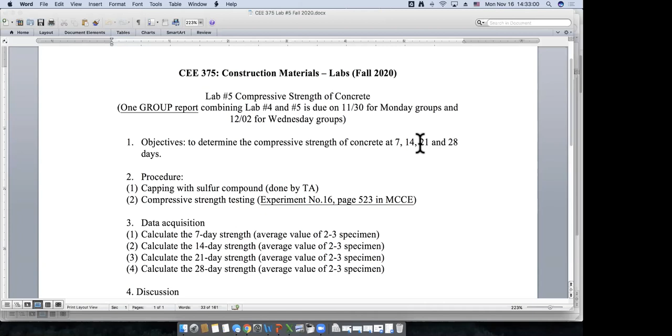The objective of this lab is to determine the compressive strength of concrete cylinder at 1 week, 2 weeks, 3 weeks, and 4 weeks.

The procedure is pretty simple. First, we get a cylinder which is cured in the curing bath, and we cap the top and bottom end of the cylinder with sulfur compound. The goal of using sulfur compound is to make sure the top and bottom end of the cylinder is smooth, otherwise we're going to generate stress concentration if the surface is not smooth, which will affect the results.

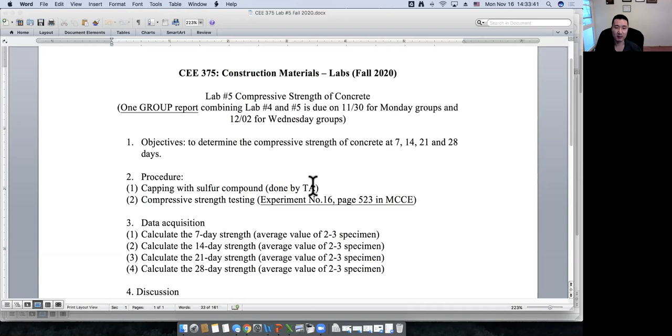This is going to be done by our TA. Then we put the cylinder in the compressive strength machine, and we check how much load the cylinder can take before failure.

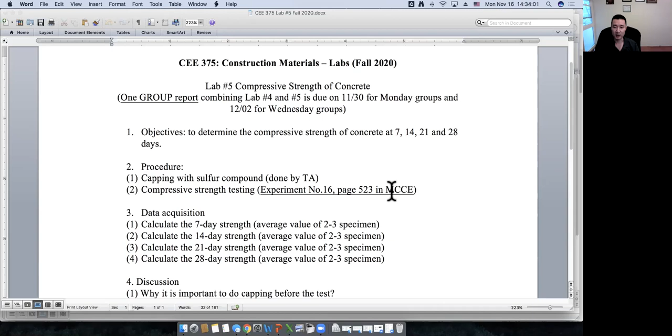This is the procedure for experiment number 16 in our textbook. I will upload all the raw data. So 7, 14, 21, and 28 is raw data, which is how much load in pounds the 3 cylinders can take at different ages, and you should calculate the 7, 14, 21, and 28 day strengths.

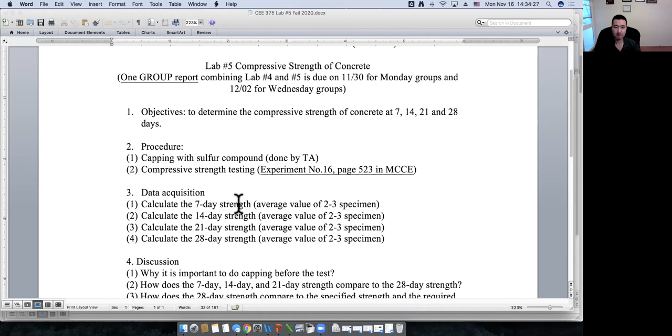For example, this is the 7 day strength, which is in pounds: 24,625 pounds for cylinder number 1. You should take the average of the 3 cylinders.

The strength, which is in a unit of PSI, pound per square inch, is the total load in pounds divided by the area, the cross section of the cylinder.

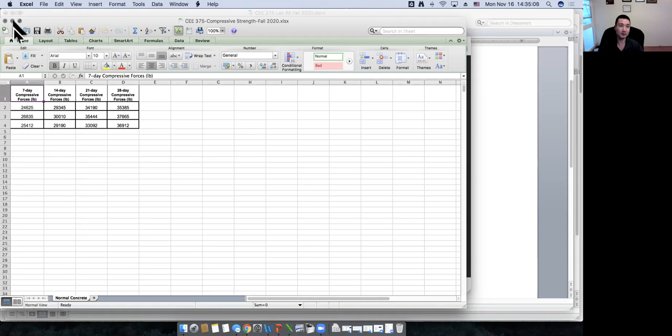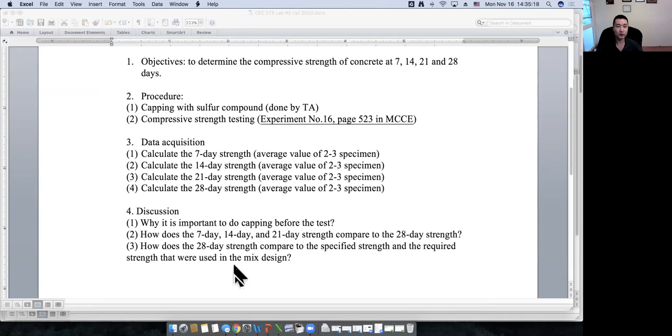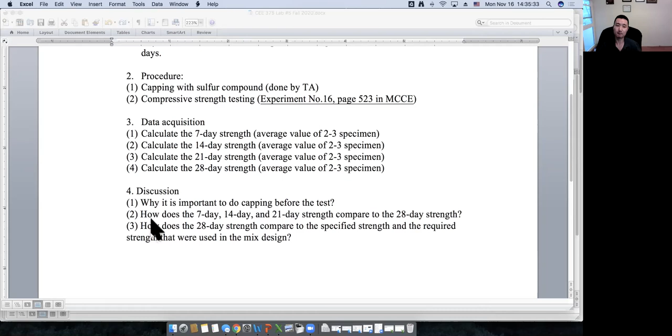Also don't forget to do the discussion, answer the questions. For example, why is it important to do capping before the test, and how does 1, 2, 3, and 4 week strength compare to each other? And how does the 28-day strength compare to the design strength, the specified strength, and the required strength that we use for our concrete mix design?

So next, let's look at the video.

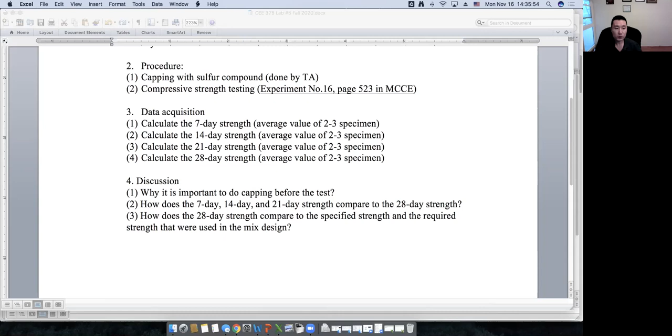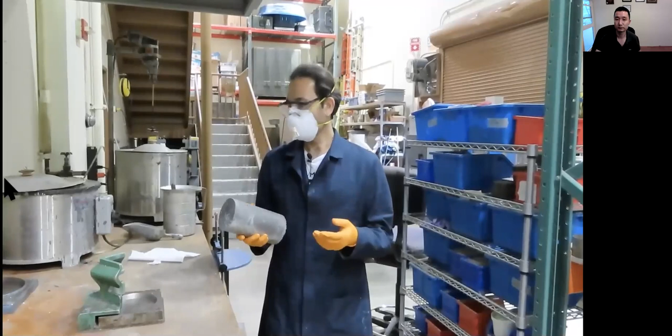I prepared my concrete samples, and today, after 7 days, I'm going to test it for the compressive strength. But before that, I'm here to cap my samples. As I explained, the upper and lower part of my sample is not even enough, and if I don't cap my samples on both sides, what I get is concentration of the stresses, and the numbers that the compression machine shows me is not accurate, typically lower than reality.

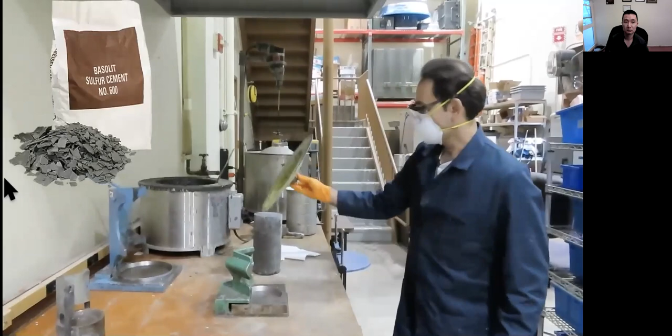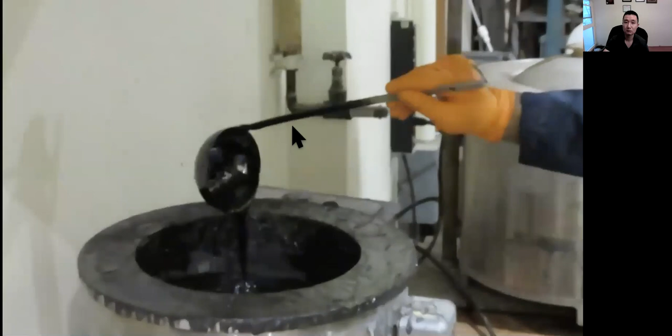So what I'm going to do today is use this capping compound. I made it 2 hours ago because I need time for the compound to totally melt. The heater melts the compound, so it is like liquid, black liquid. It is super hot, be careful, it is 450 degrees, and we need to wear something suitable to cover our skin. If for any reason it splashes on our hands and arms, the covering could help us a lot.

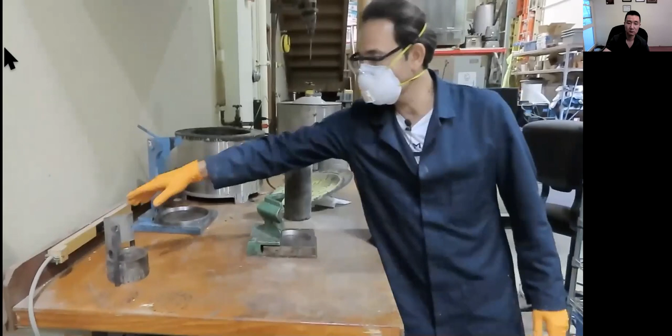We just need a suitable mold. We have 3 different molds depending on the size of your sample: the smallest one, the medium size, and the large one. For my case, I just used the medium size because it's proper for the size of my sample.

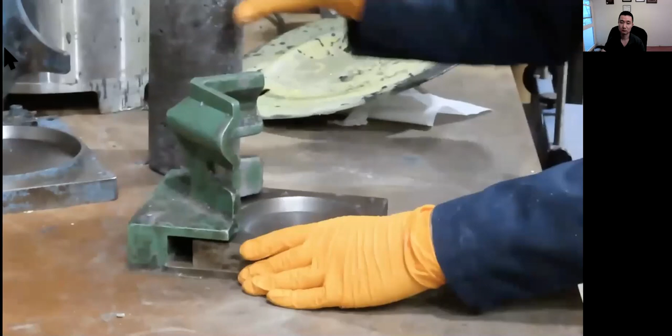Before pouring the compound in it, I have to use oil, motor oil, but not too much. I just make sure I cover all around the mold because it's going to splash on the mold, and I don't like to struggle with the mold taking out my sample for several minutes. I clean up the excessive oil because I like to have something totally even. If you have excessive oil on the mold, the capping surface is not going to be perfect, and you might see some bubbles on the surface you're capping, and I don't like it.

Okay, so my mold is ready. What I need to do is, after I pour the compound into my mold, I put my sample in its place and try to hold it vertically to this part, because this part helps me keep it vertical, and then these two surfaces are going to be parallel. Otherwise I'm going to get something like this. Make sure you hold it for some seconds, and after some seconds the compound is going to cool down and turn into something solid, and then you can release it.

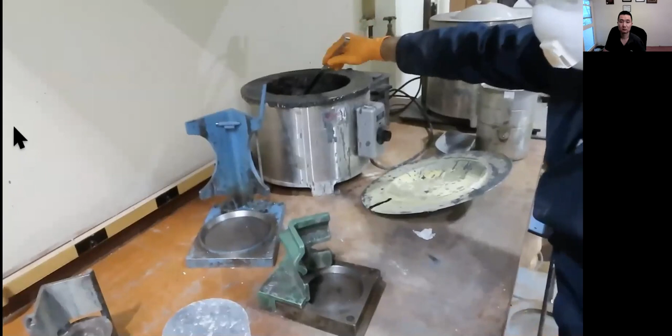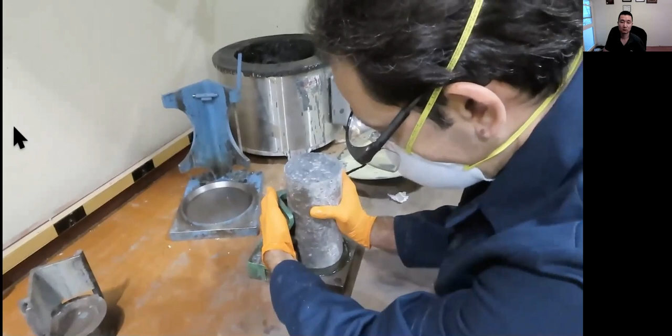The surface of my sample is not that bad, so I don't pour that much compound, just a little bit, to make sure it cools down quickly. So be quick and be watchful about yourself. I'm holding it for some seconds.

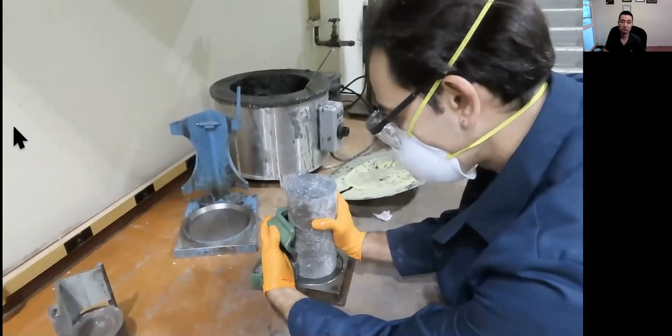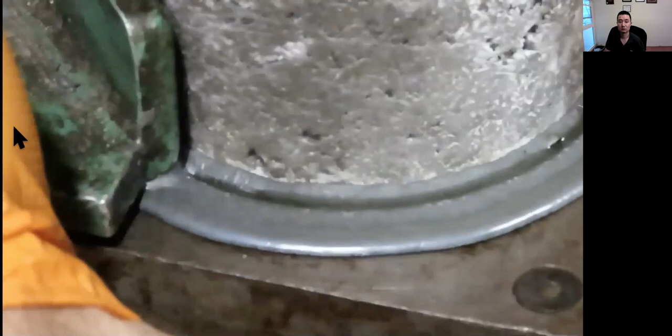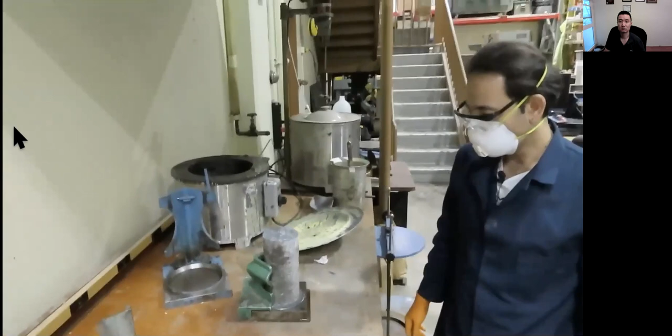If you look at the capping compound, it is dark gray now, and it is glassy, and it is turning into something with a matte color. When it is not shiny, it means your capping compound cooled down, and you can release your sample, but don't grab it yet, wait a little more. And now it's ready, so you can take it out of the mold.

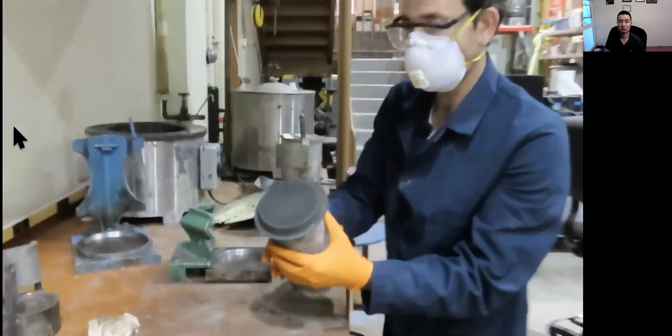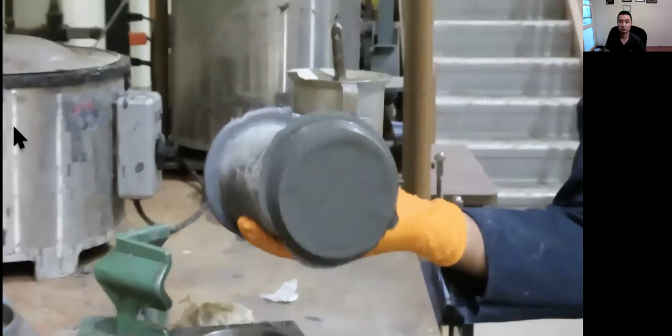And you get something like this. Nice and flat. Do the same for the other side of the mold, exactly the same procedure. There you go, so I have both sides of the sample capped. These two are totally level, exactly what I wanted.

And then I can go to a compression machine and test it for the compressive strength. So let's go to the compression machine.

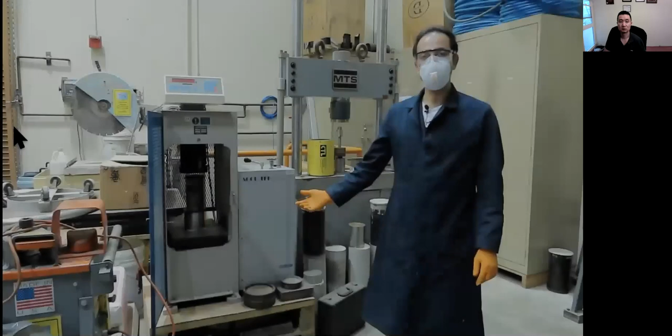Okay guys, my sample is ready. I capped it, and I'm going to test it for the compressive strength right now. We have different types of compression machines. For this machine, it is not completely automatic, so it is semi-automatic.

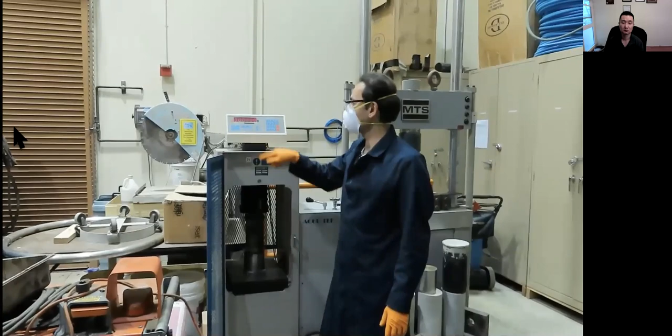So just start with the setup. I make sure that the shape and size of the sample is correct. Just press the cylindrical size and make sure that it is 4 inches. Another important part is the rate of applying the load. It is 500, meaning 500 pounds per second, the speed of the machine when it applies load, and then enter.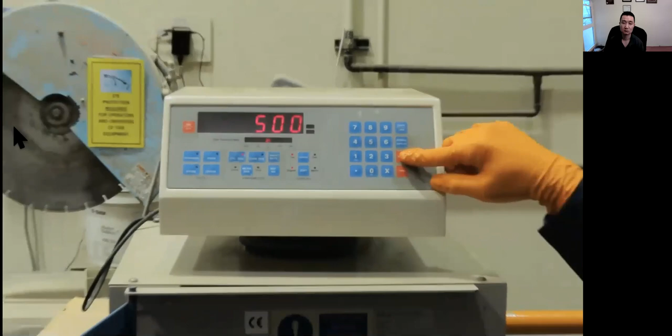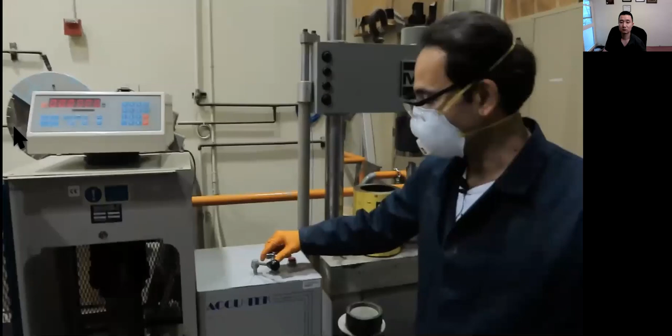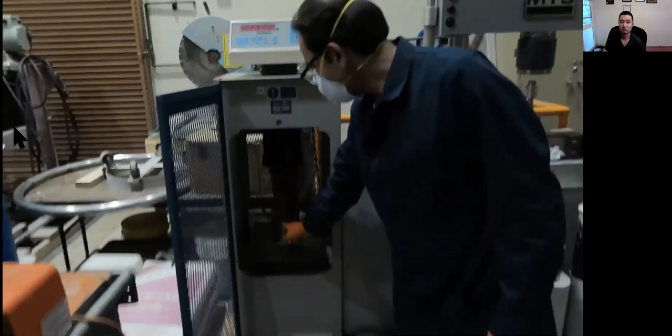In here I have a lever that can control the speed of the machine. So I typically close the valve and put it on control advance, to make sure I have enough control on the machine. I need to make sure my sample is right in the center of the lower and upper plate, otherwise we don't have an accurate number.

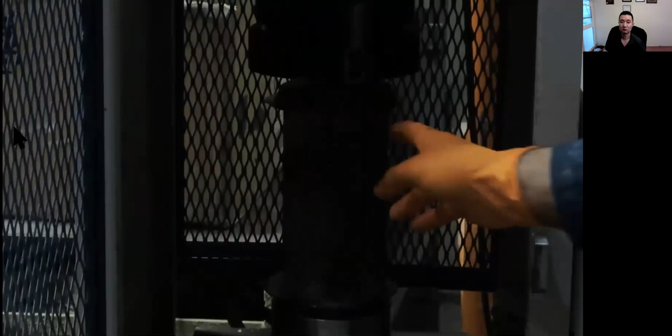So good to go. You can see there is a gap here when I turn the machine on, and when it goes up, I make the top part touch the sample, just get as close as possible, and then I'm going to put it on control advance and open the valve.

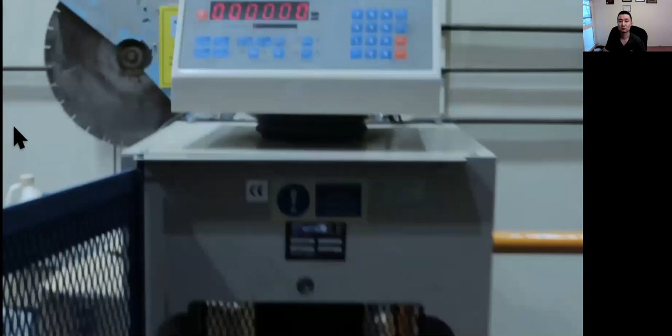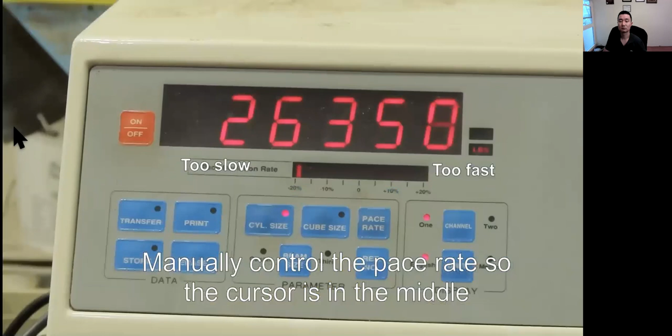Make sure that right before applying load, we tare the machine and it shows zeros. And when it's done, that is something like this. The lines go to the far left or far right and don't move, something like this.

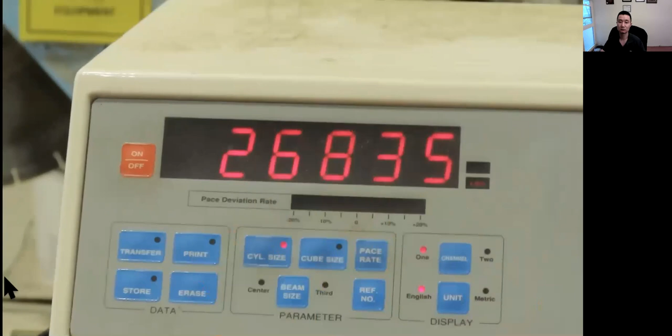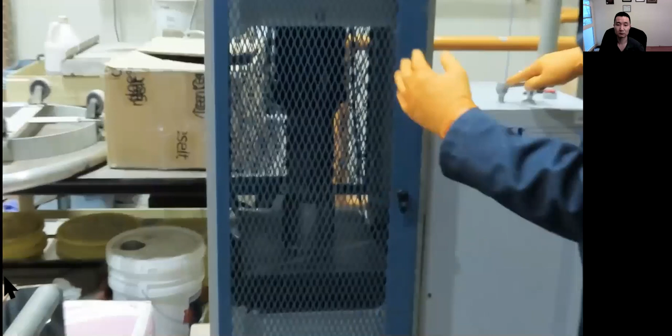And I'm done. But just to show you guys inside my concrete, I just continue applying load, crush it well. Here you go. And then turn the machine off.

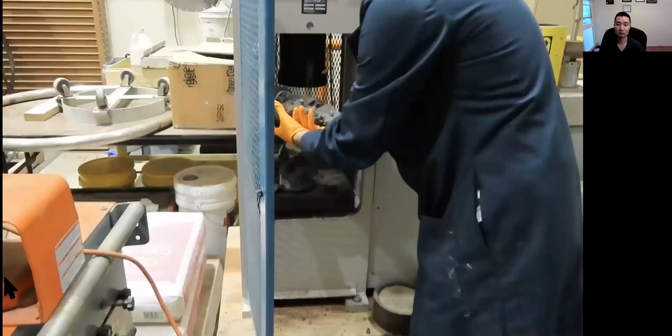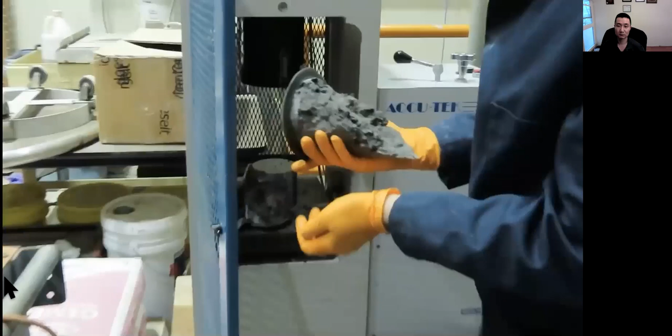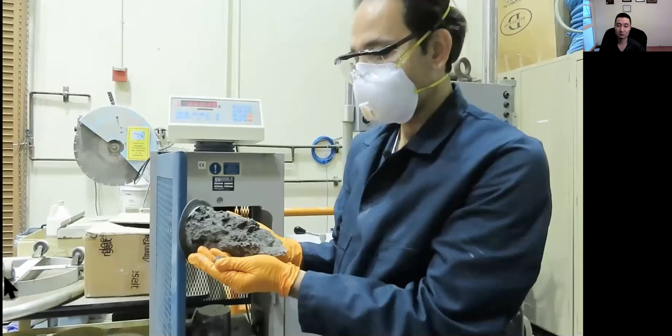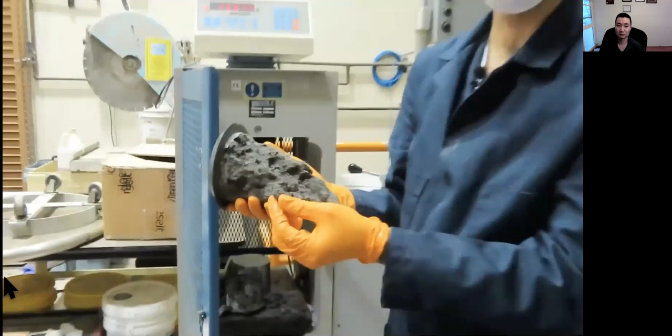For normal concrete without silica fume or super plasticizer, something like this, the paste is not that strong. It means I can take the aggregate easily out of my sample. It means that in this case, if I increase the strength of my aggregates, it doesn't matter, I cannot increase the compressive strength of the concrete.

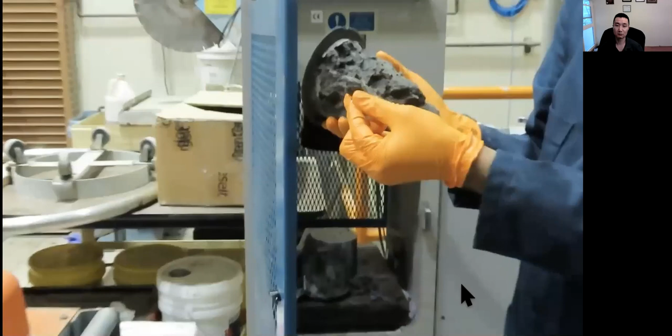If I want to increase the strength of the sample, I need to think about the paste first, because my glue was not that strong. I could detach the aggregate particles easily. It means that a stronger aggregate cannot help me.

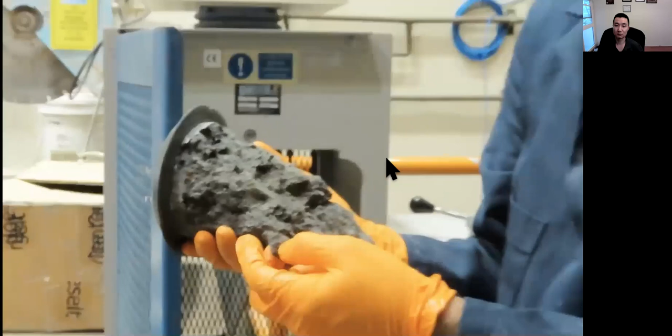For high strength concrete, what we typically do is strengthen the binder first. When the binder is strong enough, then it's time to increase the quality of the aggregate.

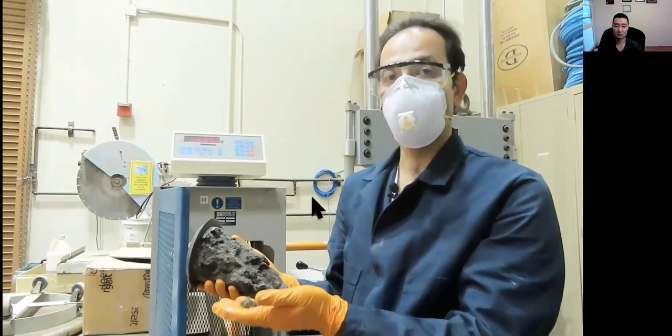I'm going to take all your samples, put them on the machine. So for each part, for example 7 days strength, I need 3 samples, put them under the machine, test them, write down the number, and then send you the data. You need to make the average from these 3 numbers for 7 days, and then next week for 14-day, 21-day, and 28-day compressive strength. These numbers are not the compressive strength themselves.

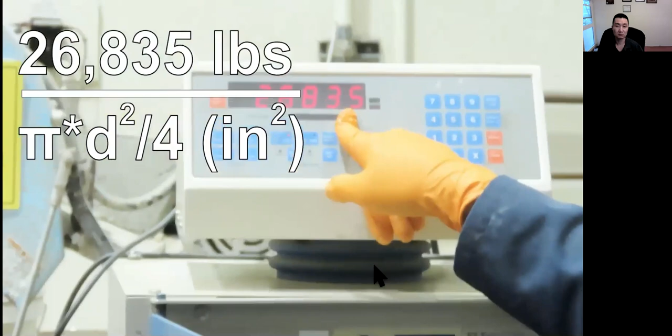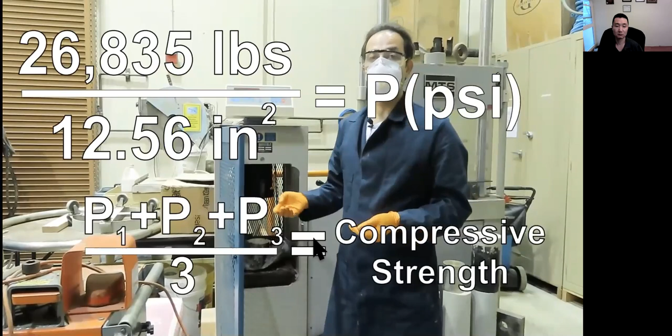They are the ultimate load that your sample could tolerate. You need to divide this number by the cross-section area of your sample, that is pi d squared over 4. So you just need to divide this number, that is 26,835 divided by 12.56, and the result is going to be the compressive strength of this sample. Then you have 2 more numbers, make the average, and report for the 7-day compressive strength of the sample according to the data I'm going to send you. Thank you guys.

Okay, so what Reza said is very clear. Remember the fracture surface: for this normal concrete, the fracture surfaces basically go around the ITZ. The aggregate itself does not crack or get damaged. So let's go back to the weakest link theory we talked about earlier. For normal concrete, the weakest link is the cement paste and ITZ, so the aggregate is strong and is not touched. Just follow what he said about how to calculate the compressive strength and plot the curve.

Okay. All right, let me see.

Yeah, so that's about it for today's lab. I already uploaded the results for 7, 14, 21, and 28 days, how much load in pounds the cylinder can take. You can go back and calculate the compressive stress.